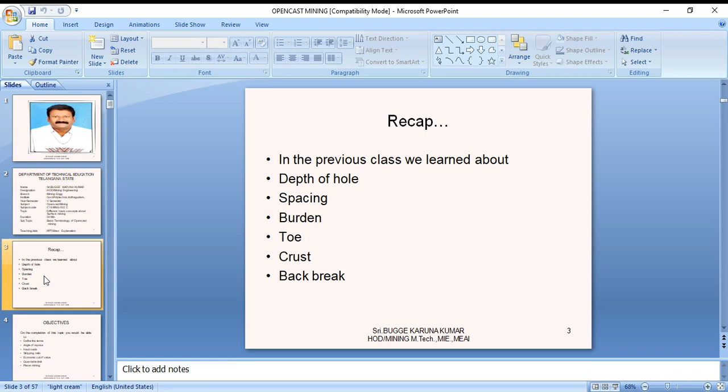Coming to the basic objective of this lecture, I am going to explain one by one: define the terms angle of repose, haul roads, stripping ratio, economic cut value, quarriable limit, and placer mining.

These are most of the terminologies encountered in the Opencast mining system. Except placer mining, which is not exactly related to this terminology but a matter already covered in earlier classes, as per syllabus I think it will be included. So let us define the terms within that terminology.

Angle of repose is one important terminology. Without understanding angle of repose, the entire system will collapse, because you study the character of the material, the boring nature of the material. Otherwise, the formation of the benches or formation of the walls becomes a big challenge if you ignore the angle of repose.

Coming to the second definition, the haul road is the key and actually the backbone of any Opencast mine, because for the depth of 100 to 500 meters in the open cast system, carrying the material is only possible by transport through haul roads.

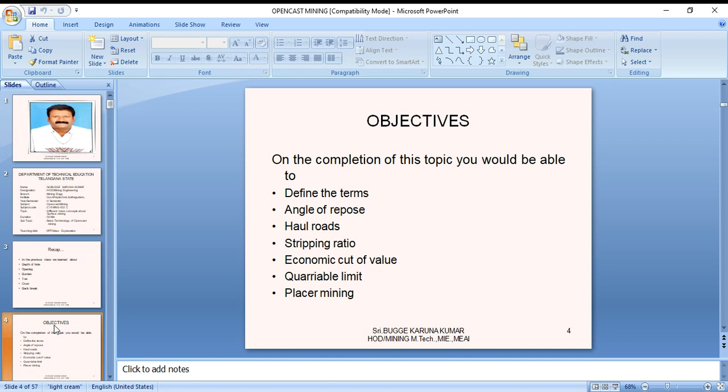I have already explained this, but it is given here again. And quarriable limit: what is the limit from which to which, and also the other methods. These are the things we are going to discuss in this slide.

Then, angle of repose. The basic definition: when a loose material is subjected to settling over the ground, the slant edge makes some angle with the horizontal, and it is known as the angle of repose. Once again reading: when the loose material is subjected to settle over the ground, the slant edge marks some angle with the horizontal. It is known as the angle of repose. This is the basic definition.

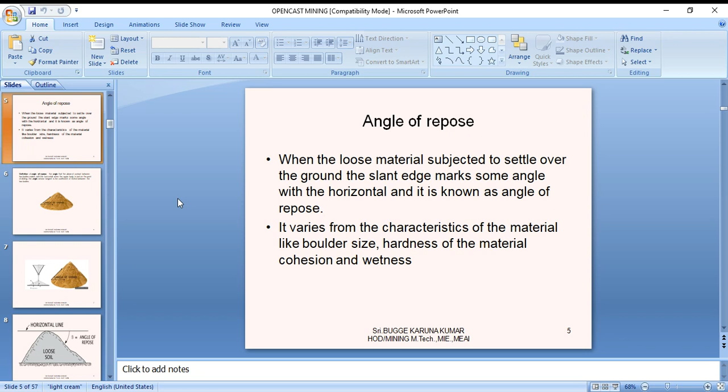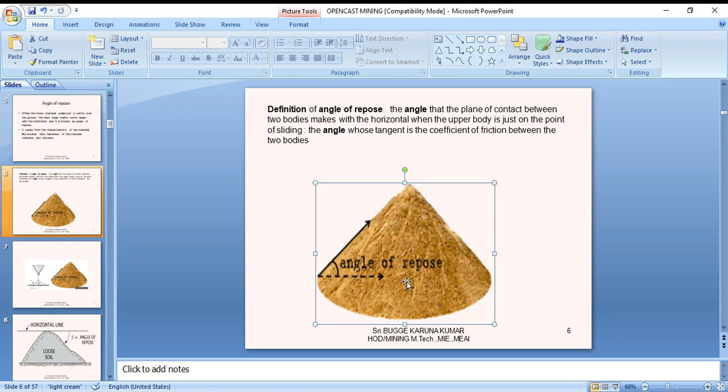Definition of angle of repose: the angle that the plane of contact between the two bodies makes with horizontal, with the upper body just on the point of slide. It is the angle whose tangent is the coefficient of friction between the two bodies. This angle, the tan theta, is the coefficient of friction between the two bodies.

This is a very important parameter in slope stability and bench angle maintenance. This is a very essential factor for bench design or slope design.

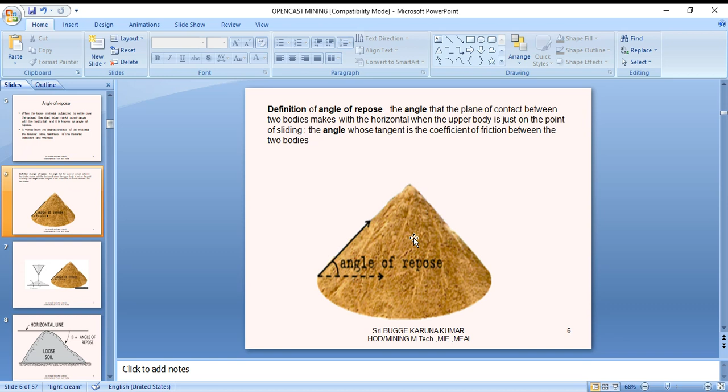So one more slide I'm showing for more explanatory purpose. Here also you can observe this is the angle, and this is the pour of the material. At some angle it will be settled, and that angle is the angle of repose.

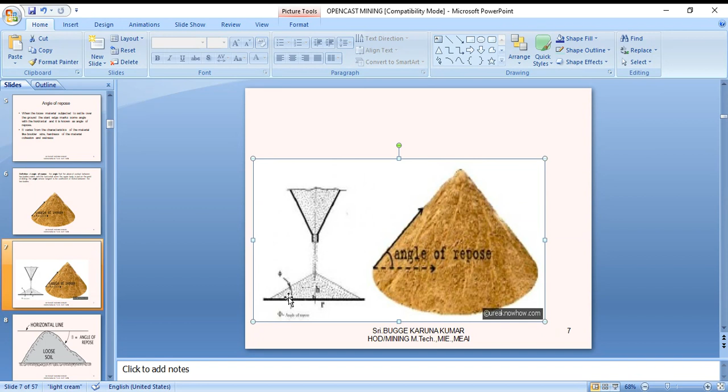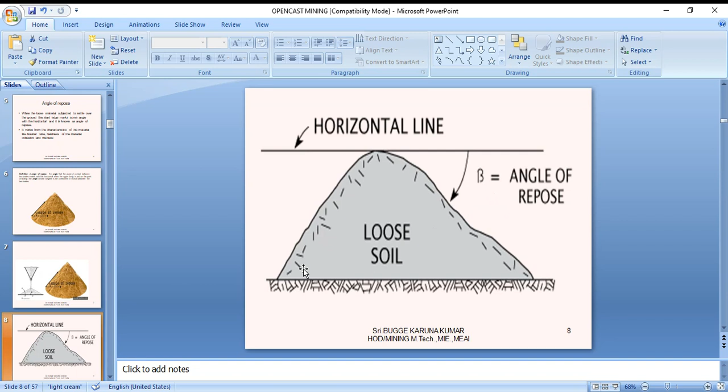For mathematical calculation purposes you can explain this, like a friction problem, it can be easily explained. Similarly, angle of repose can also be explained this way. This is defined as the angle which an inclined plane makes with the horizontal such that a body kept on it just starts to move, similar to the friction definition.

So here a block is there, just about to move downwards. That angle is called the angle of repose. Depending on friction, some load movement occurs. Whatever force is required, the force will always act against the downward force. If these two are equal, the block is not moving; if the downward force is more, it automatically slides down. So fundamentally we consider two forces acting.

One is a horizontal force and one is a vertical force, and on the opposite side the reaction is also there. So theta is the angle made here, and mg is the body weight. So mg sin theta is in the horizontal direction and mg cos theta is in the vertical direction.

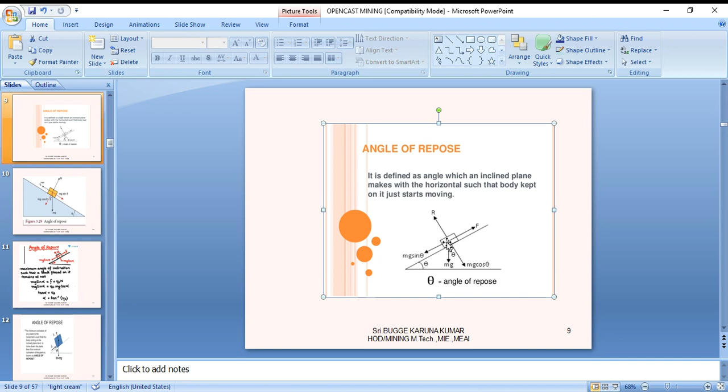The block is moving. F equals mg sin theta is the force in that direction. Similarly R equals mg cos theta. So theta is the angle of repose. This is a simple mathematical problem from friction, and we can calculate this theta, the angle of repose, and how it is maintained for a particular point.

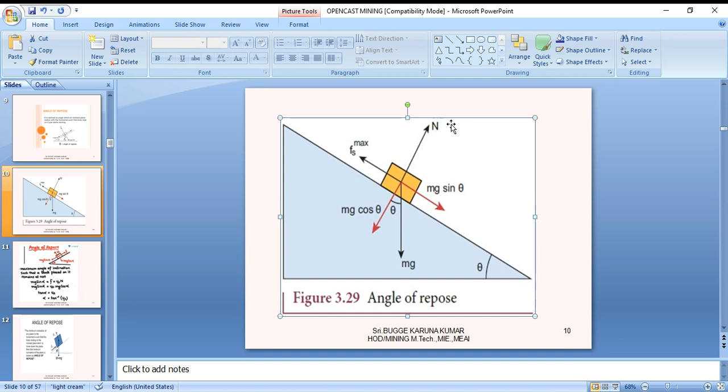Now coming to this, I can explain it again here. The angle of repose is theta. Theta relates mg sin theta, the vertical force, these are again explainable things. The normal force or reaction force is equal to mg cos theta, and mg sin theta is equal to the frictional force.

Now the complete calculation I'm showing here from the understanding level. So you can see mg cos theta is the vertical force. We are now using alpha instead of theta as in the previous slides, but there is no difference. Here I am using alpha as the angle, so don't get confused between theta and alpha, both are the same, just for calculation purposes it is made like this.

This is the maximum angle of inclination such that a block placed on it remains at rest. As seen in the earlier slide, force equals mg sin alpha, and that is equal to mu s times N, where mu s is the coefficient of friction and N is the normal force, so that is almost equal.

Similarly, mg sin alpha equals the friction force. N is the reaction, which is nothing but mg cos alpha. So f equals mu s into n. Therefore sin alpha by cos alpha equals mu s, taking cos alpha to the left side, the mg automatically cancels, since mg is nothing but the weight of the block.

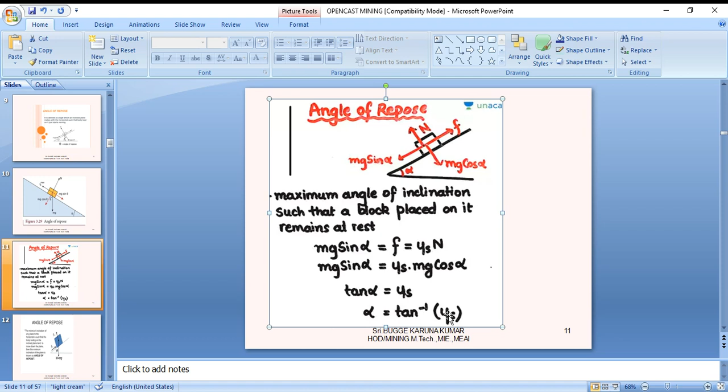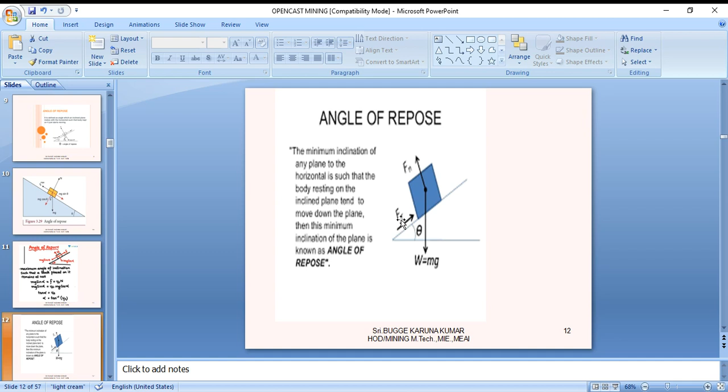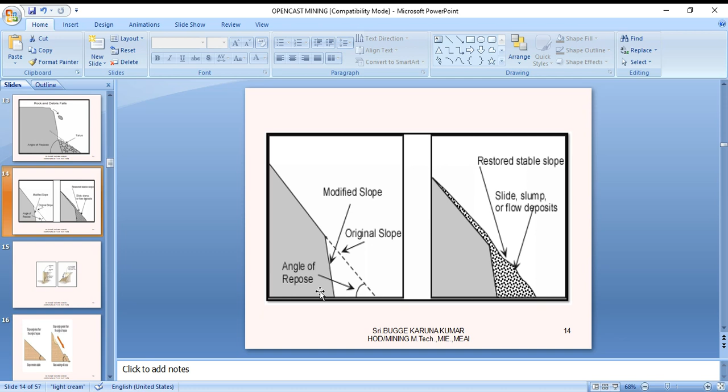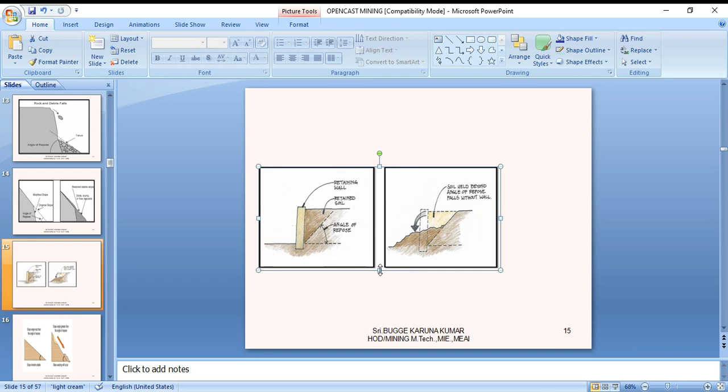I will show you one more slide on the angle of repose. This is one more example.

This is a retaining wall. Sometimes you use this, mostly coming to hilly areas, particularly in temple hilly areas, for example Vijayawada Kanakadurga temple, or if you go through the Konkan railway areas.

So maintaining a retaining wall is also very important. Otherwise, if the retaining wall is not there, I am showing how much level it will fall. Here the retaining wall holds the retained soil, which has its own angle of repose. If the retaining wall is not there, the complete soil material will fall.

So for example, if the wall is not there, this much material will be falling because the angle of repose limits retention to this much angle. Whatever is in excess of that angle will simply slide over. So how much is that angle? As already shown, alpha equals tan inverse of the coefficient of friction.

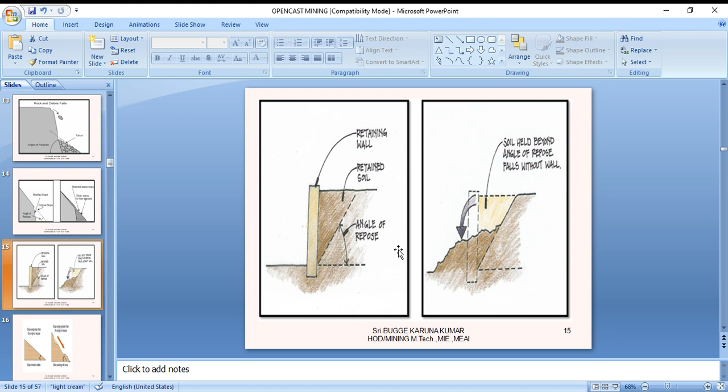The slope angle of the walls you maintain, the slope angle of the material you are powering, this should be equal to the angle of repose. If the slope angle is more and the angle of repose of the particular material is less, then automatically the difference in angle will fall. This is clearly shown here.

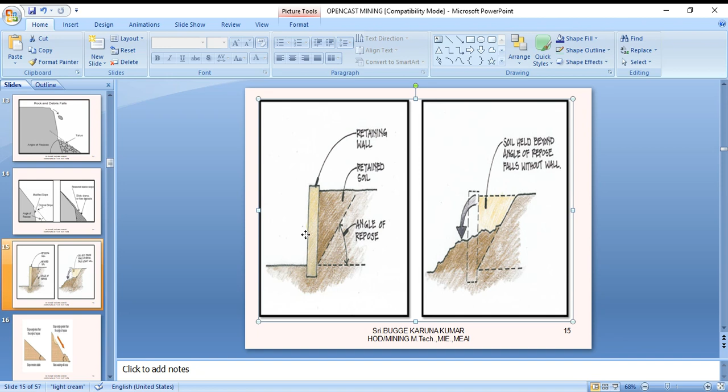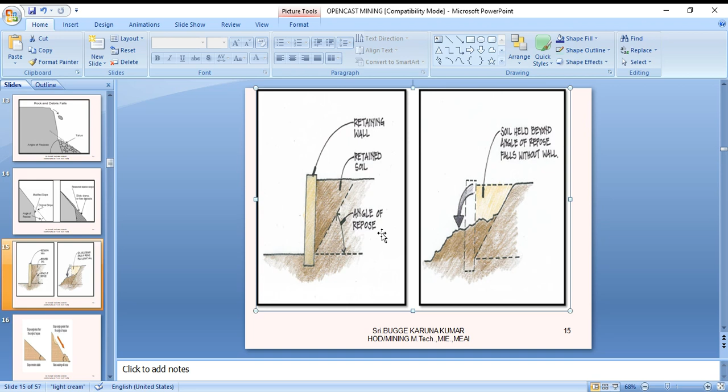This is the angle of the bench maintained, which is vertical. For example, this is the angle of the maintained slope, but actually the angle of repose is less, so this much material falls automatically. This is a complete conclusion: when the slope angle is less than the angle of repose, the slope remains stable.

When the slope angle is greater than the angle of repose, mass wasting will occur.

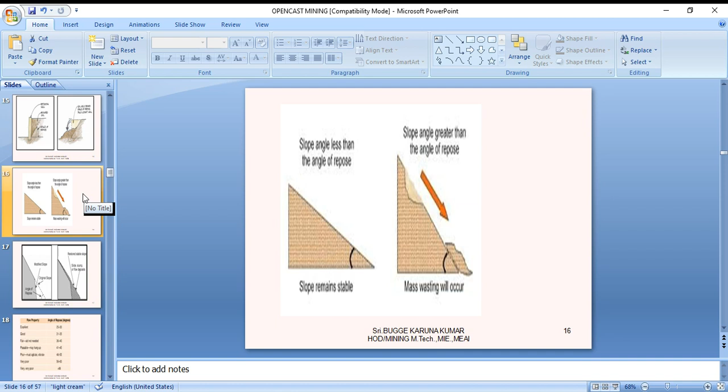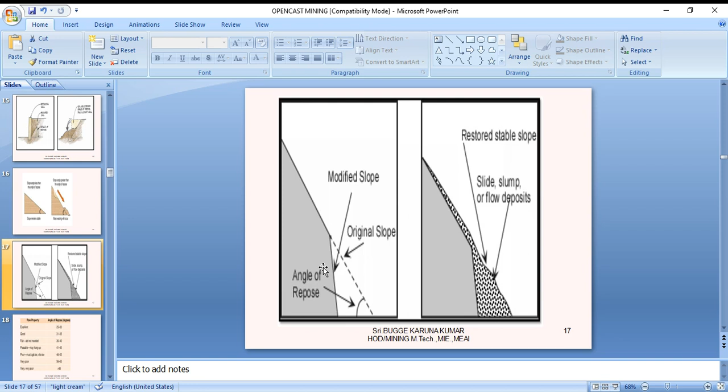Okay. Now coming to the angle of repose in degrees, which is the best one? Which angle is good, which angle is fair, which angle is passable, which angle is poor, which angle is very poor, which angle is very, very poor. So these things will be shown here. The flow property angle of repose I am showing here.

Passable, may hang up, that is 41 to 45 degrees. Poor, must be agitated and vibrated, 46 to 55. It's dangerous. Very poor, 56 to 65. Very, very poor, more than 66.

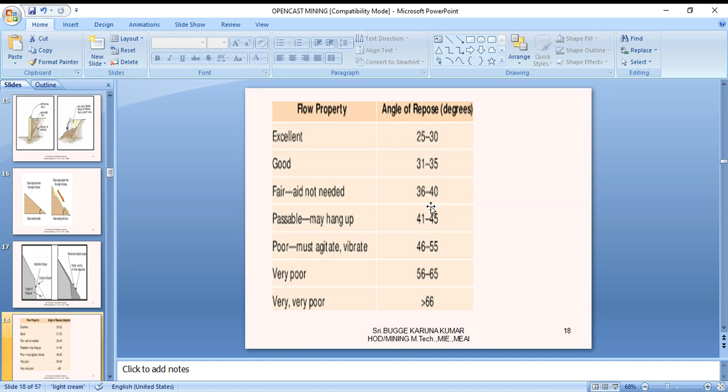So by seeing this we conclude that wherever we are checking the slope stability, if it's more than 60, the possibility of it running is more, 56 to 65. So we can conclude 45 and below is better. Below 45 is better; more than 45 has some risk.

Now, what is the rock type and the angle of repose? Loose sand, can you see? That is 32 to 34 degrees. Generally, the angle will vary. Loose sand with clay, 37 degrees. Similarly, wetland 22 degrees. Soil clay, 40 degrees to 45 degrees.

So see, loose sand, 32 to 34 degrees. Loose sand with clay, 37 degrees. Wetland, 22 degrees. Soil clay, 40 to 45 degrees. Broken rock, 34 to 40 degrees. So different types of material I am showing here. So depending upon the property of the rocks and the character of the soil, that angle will be maintained.

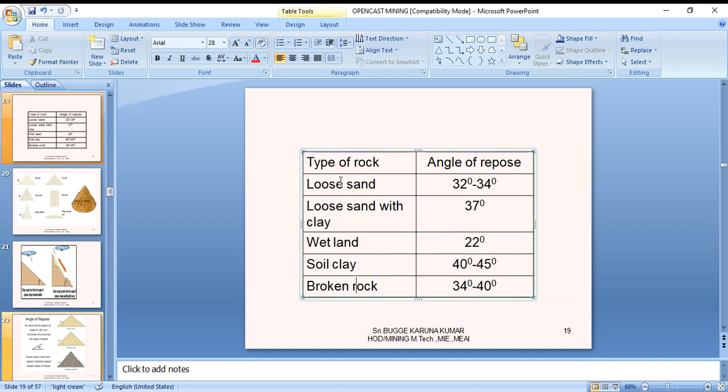Now, I repeat pictorially in one more slide shown here. So sand at 35 degrees will be stable. Dry sand also stands at 35 degrees. If it is more than that, it will fall down. Coarse sand will have more angle possible. Pebbles also, and water saturated sand will be like this. So this is the first example of the angle of repose.

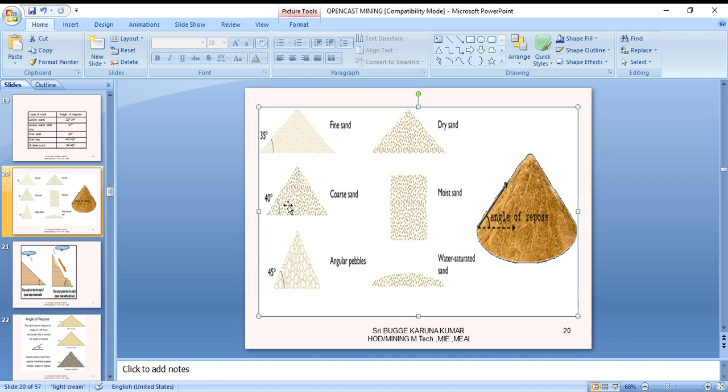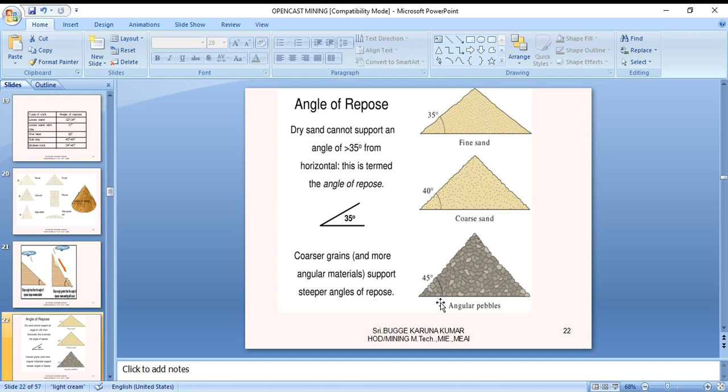Dry sand cannot support an angle more than 35 degrees from the horizontal. This is termed the angle of repose. Coarse sand, 40 degrees; coarse grained and more angular material supports a steeper angle of repose. Here, angular pebbles are shown. So fine sand, coarse sand, angular pebbles.

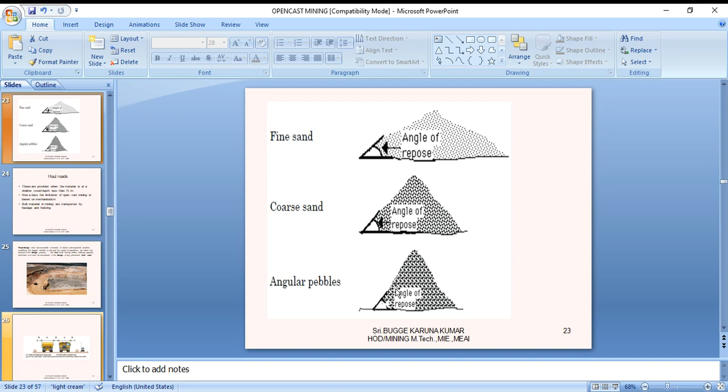Then we go to the second definition, that is the haul roads. As I already told, it is the backbone of transportation in open cast. Haul roads are meant for moving the heavy earth moving machinery in the open cast. These are not straight roads. They will be helical and spiral in nature, going up and down. And also traffic is required.

So one haul road for the one-way system and the second is a return system. So you have to maintain two vehicles moving in the path. We have to maintain the haul roads depending upon the capacity, tire management, no slippage, speed control, and also the curve system. The curves are also important, otherwise vehicles will fall down. These are to be considered in haul road design. These are provided when the material is at a shallow cover depth less than 15 meters. Nowadays, the limitation of open cast mining is based on mechanization.

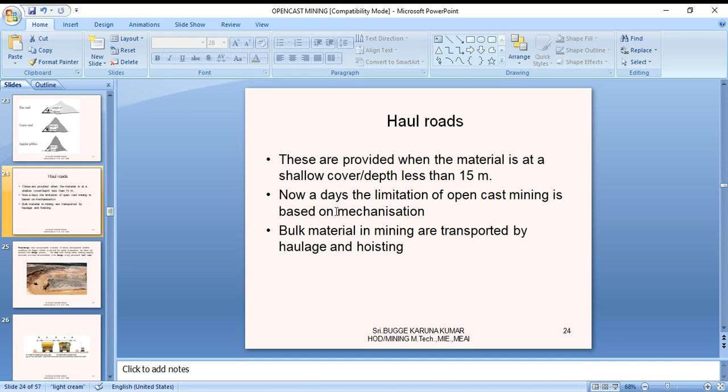Bulk material in mining is transported by haulage and hoisting. Road design is a must. The road design must accommodate a number of factors and expected weather conditions. The largest vehicle on the site and the speed of operations are taken into account in the design process. The haul truck turning radius, braking capacity, and tire size must be considered in the design of any permanent haul roads.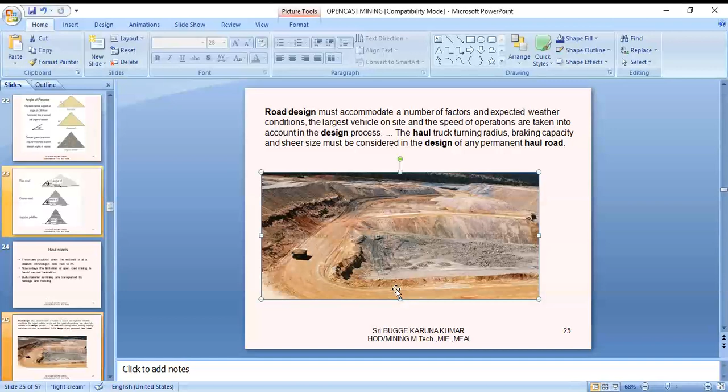So here is a simple example I am showing by using haul roads. So these are the open cast haul roads. See here, this is a simple haul road. The vehicle is moving from here to here. For dumping purposes, the material is taken upwards. So you have to maintain this. The curve also has to be maintained. If any vehicle is coming in front, they need sufficient clearance.

And also the junctions. There are some side junctions. So if the vehicle is coming this side, and this side is the junction, and some vehicles are coming this side, you have to maintain junctions as required. So haul road design is one of the key backbones of the open cast transport system. So that is very important. I'm going to the next slide.

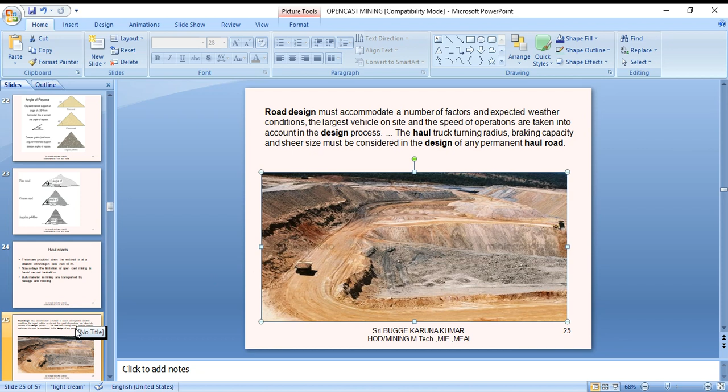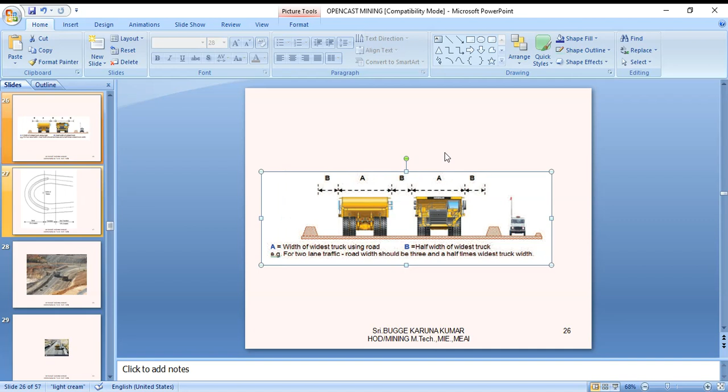Here is a typical example I'm showing for the haul road. So two dumpers are here. One is incoming and one is going outside. And also sometimes they use a pilot. The persons who are observers, that is the manager or supervisors, can travel in their own jeeps. So that is also separate. On the haul roads no vehicles are allowed except the supervisor's vehicles. The supervisor vehicle lane will also be separately maintained here.

So come here, see that A is center to center and B is the clearance from the boundary to the vehicle, and also middle to middle. So you have to maintain B in a similar way. So A is equal to the width of the widest truck using the road. So here to here is the basic width of the road. And capital B equals half the width of the widest truck. So we take A into half. This half should be on the left side. This half should be on the right side.

So for a two-lane traffic system, road width should be 3.5 times the widest truck width. So two-lane traffic road width should be how much? 3.5 times the widest truck width. So this is a thumb rule, a basic rule of any haul road design. For two-lane traffic, the road should be 3.5 times the width of the truck. For example, if it is 5 meters, then we take 15 plus 2.5, that is 17.5. That is the thumb rule of haul road design.

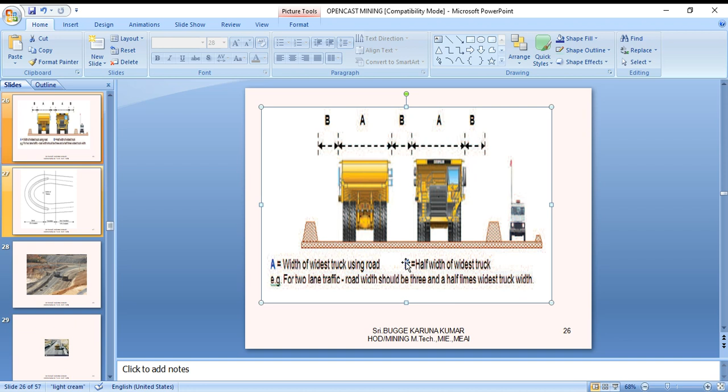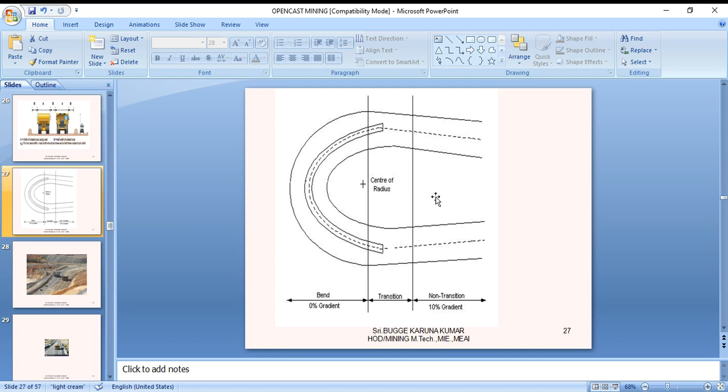This is the bend. So they have to design it in such a way that the vehicle does not fall outside due to the centrifugal force. The vehicle may come inside due to wrong design of the curves. That should be considered in an effective way when you design haul roads. I am showing one simple picture of a real open cast. These are the managers, I think.

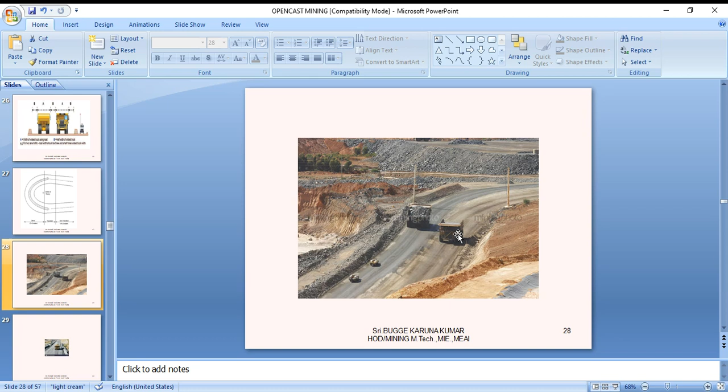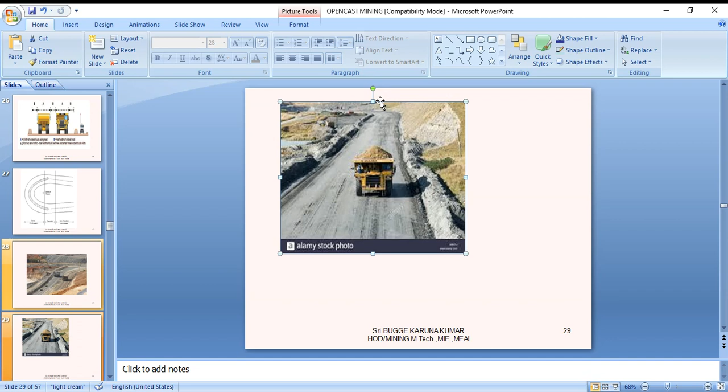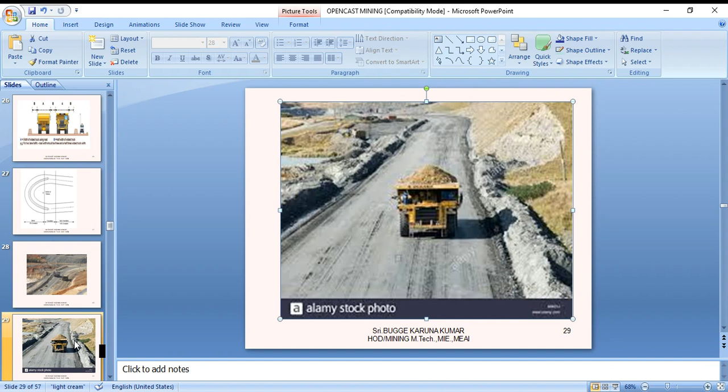So one more picture I'm showing here. This is also elaborating this. So here a single vehicle is coming. Yes, this is a single vehicle coming. So this is also showing the haul road, how the haul road will be there. And then this is a complete picture of the opencast haul roads. So it is moving like this inside the area.

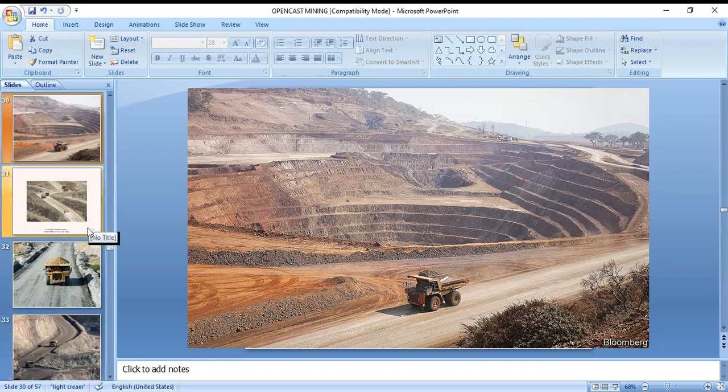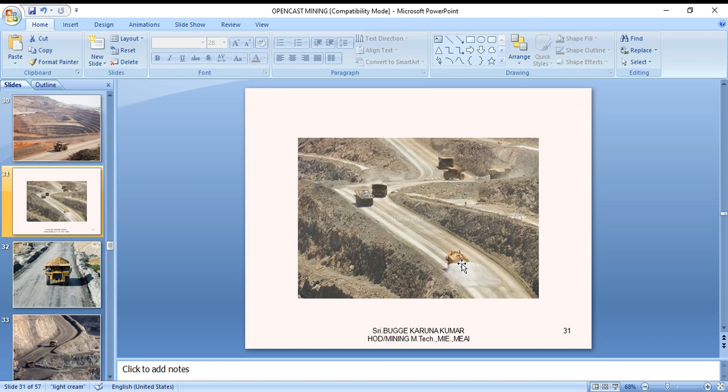So one more picture I'm showing. This is the traffic here. You see, observe. This is the traffic area. This water sprinkling is completely due to the hardening of the floor of the haul road. So one vehicle is coming inside the mine. One vehicle is going upside. Here there is a junction. Some junction is showing there, and also it is curved in nature. These are curved. So you have to design in such a way for the width and moving of the vehicles in the traffic junction also.

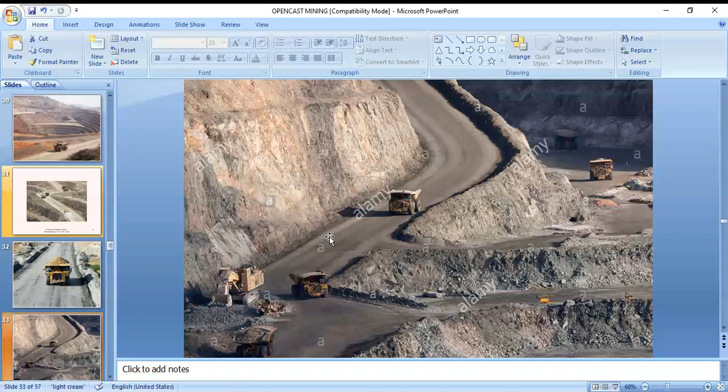So here it's very clear. It's coming down. The vehicle is ready to be loaded and ready to go in. This is the junction, and some vehicles are going from inside to outside, and also the other asset is also there. There is continued opencast working activity. So some work is going on here. The shovel. So this material can be loaded and taken out to the dump yard, the dump system provided by the managers. So this is the clearance of haul roads I'm showing here.

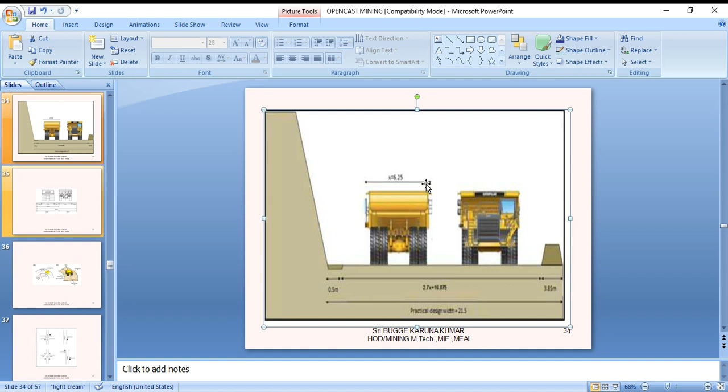Right here, showing that. So here the complete dimensions are given. So 3.85 meters, this is there. Overall, the practical design width is 21.5 meters. So this is a simple calculation. This is 0.5 meters for drainage or water pipelines or something. So the overall width is 2.7 times the width of the vehicle; this is the complete width of the haul roads.

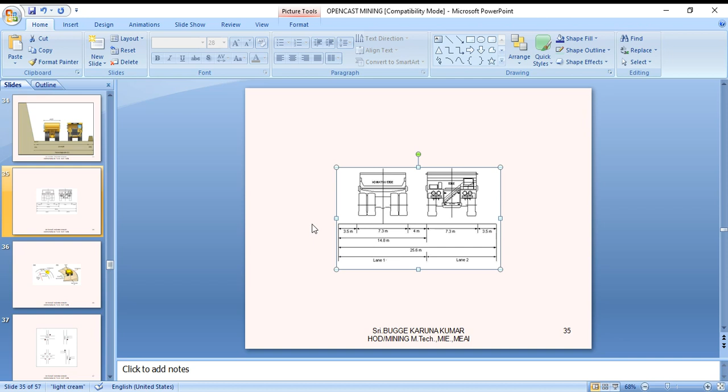Similarly, I'm showing that in a line diagram here. So here it's very clear: lane one. This is lane one. This is lane two. 25.6 meters total width. So here you can observe 3.5 on the other side, and then 7.3 is the width of that one. And 4 meters clearance is here, and 7.3 is there, and 3.5 on this side. So total from this point to this point is 14.8 meters, and from this to this point is 14.8 meters. So overall width of 25.6 meters.

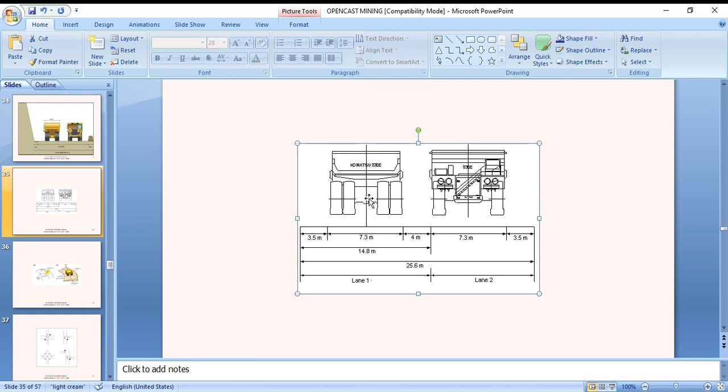Simply we can calculate it like 7.3 multiplied by 3 plus 3.5 plus 1.5, so almost 25.6. We'll get it in calculations. The point is, 7.3 multiplied by 3, and add another half, that is almost 3.5. We will get the answer. So that is the design of the haul road from lane 1 and lane 2.

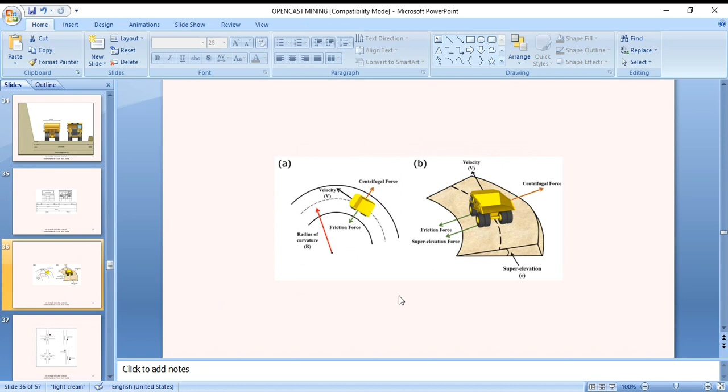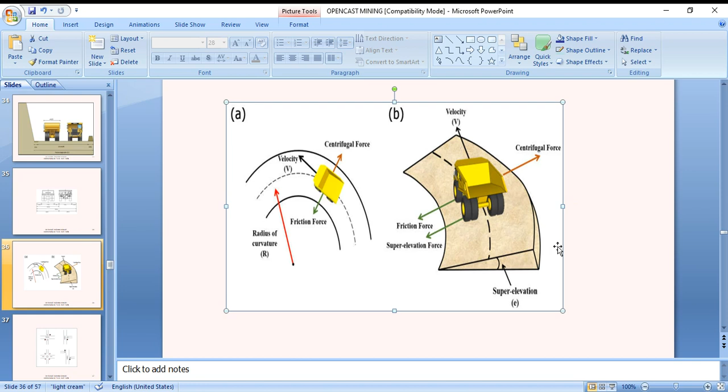Now the curved nature is also one important aspect, because most of the mine is spherical and curved in nature, because for haul roads direct distances are not available. In such conditions, centrifugal force and friction force are active. Velocity is also important. Radius of curve. So these three factors are very influencing on the vehicle. So see, the dumper is going on at a velocity, the centrifugal force is acting, the friction force is acting. In such conditions, the super elevation angle is also important. The more the angle maintained, the more the speed. If the speed is limited, you have to maintain the berm accordingly. So these are the important factors while designing the haul roads.

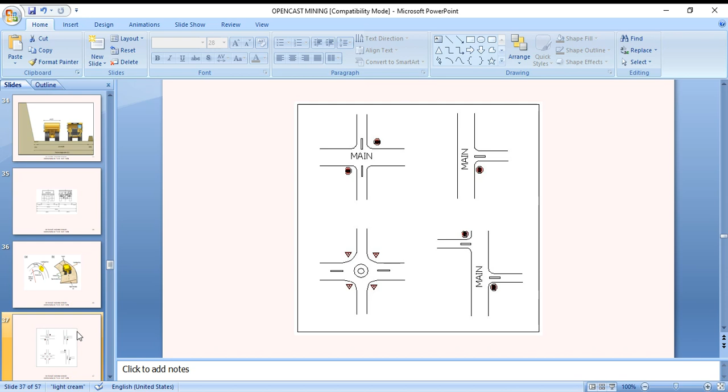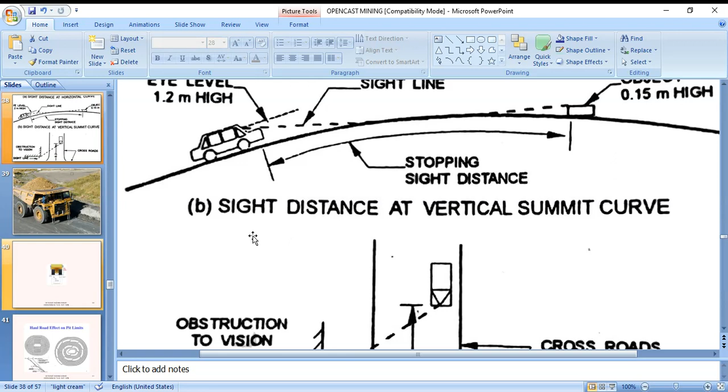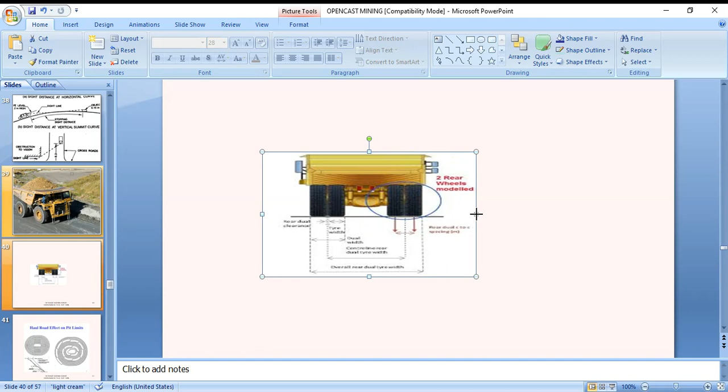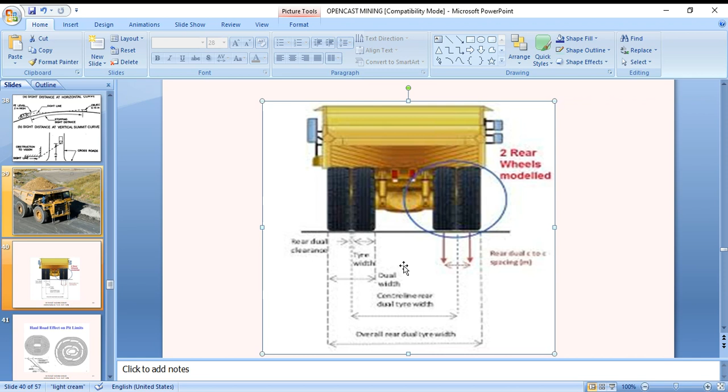Then this dumper is one of the figures. I'm showing here the dimensions of different dumpers and how they will influence the road. Here two rear wheels are modeled. These are the distance center to center, the width, and the rear tyre width. So this is also one of the influencing factors you have to consider for the design of haul roads.

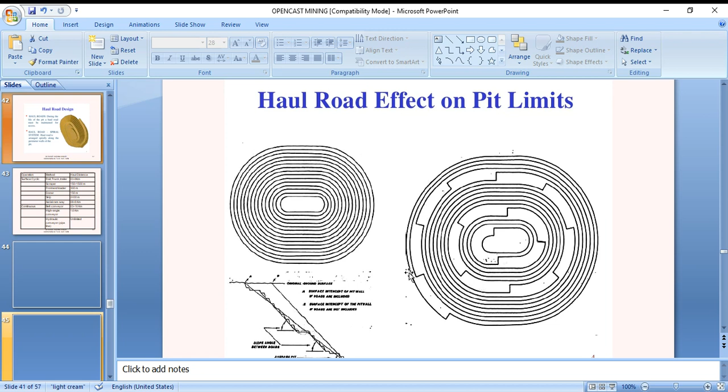So overall, on the top you can see the road is helical in nature. You have to design haul roads suitable to the vehicle as well as the vehicle suitable to the haul roads. During the life of the pit, the haul road must be maintained for access. In the spiral system, the haul road is arranged spirally along the perimeter wall of the pit.

Coming to the different types of speed, surface cyclic, continuous. These are the other vehicles. So now I conclude haul roads and go to the next topic.

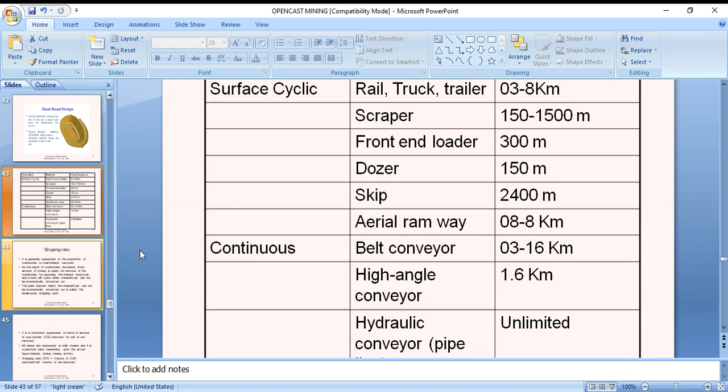So these are two important definitions of the stripping ratio. This is the ratio between overburden and mineral. If the depth is more, automatically the waste removal is more. So the coal versus the stripping ratio should be economical. Beyond the break-even, the waste is more and the coal obtained is less. So the economic stripping ratio is very important while designing the angle of the slope of the benches or

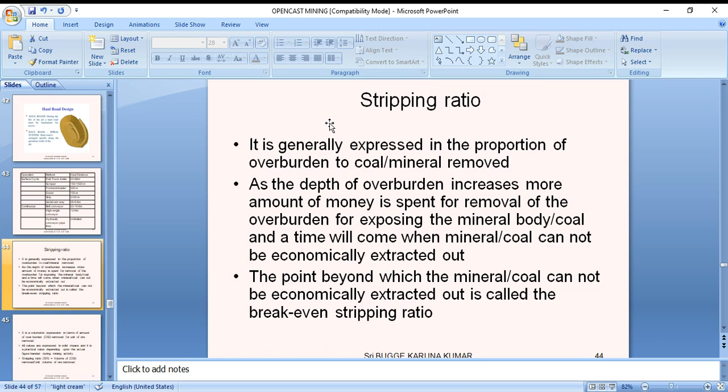overall bench. It is a volumetric expression of the amount of overburden removed per unit of ore removed. All values are expressed in solid measure, and it is a practical value depending upon the actual figures during mining activity. Stripping ratio equals volume of OB removed per unit volume of ore recovered.

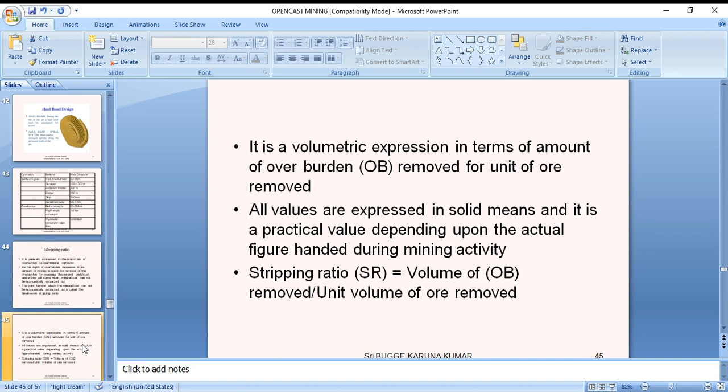Now the standardized ratios. In manual mining, it is 1 is to 1. In semi-mechanized, it is 1 is to 1.2. In mechanized, 1 is to 3 to 1 is to 10. Highly mechanized, it may be 1 is to 10 to 1 is to 20. So depending upon the

mechanization: manual means they're not using drilling and blasting, loading manually. These are the influencing factors. Semi-mechanized means the transportation has some mechanization, so the cutting speed will increase. Mechanized is completely mechanized, with drilling and blasting going on fast, so dumper size and loader size increase, and road widening is required for the movement of vehicles. So depending upon the scale of mechanization, the stripping ratio will vary from area to area.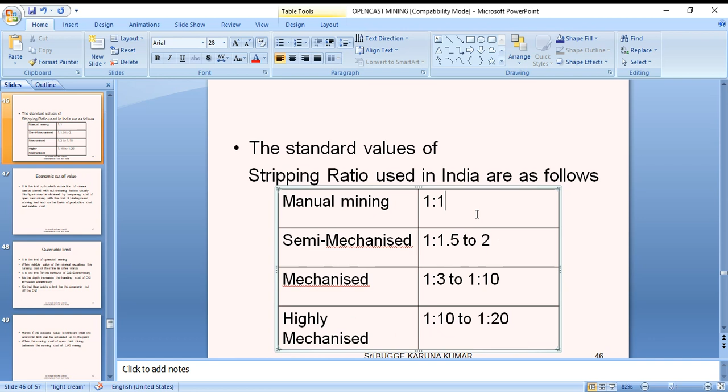So what is meant by cut-off value? It is the limit to which extraction of the mineral can be carried out without incurring losses. Usually the figure is obtained by comparing the cost of the opencast mine with the cost of underground working, also on the basis of production cost and saleable cost. So the economic cut-off value is from that point of view, the selling value, the marketable value. Say 2,000 per ton in the market.

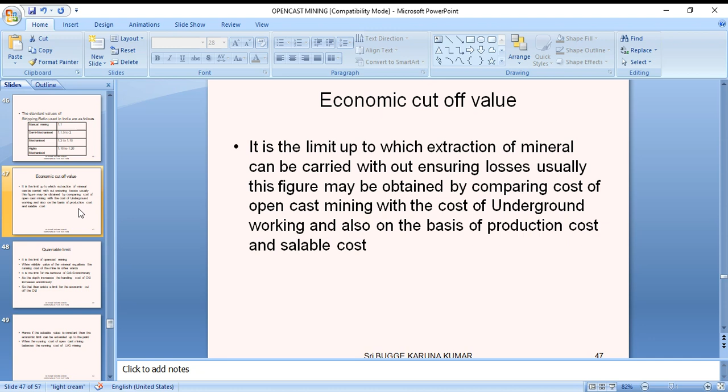So, 2,000 rupees of value you have to distribute. That is economical or uneconomic. So that is one important economic factor of computation.

Quarry limit is very important. It is the limit of an open cast mine, when the realizable value of mineral equals the running cost of the mine. In other words, it is the limit for the economical removal of OB. As the depth increases, the handling cost of the OB increases enormously, so there exists a limit for the economic cut of the OB.

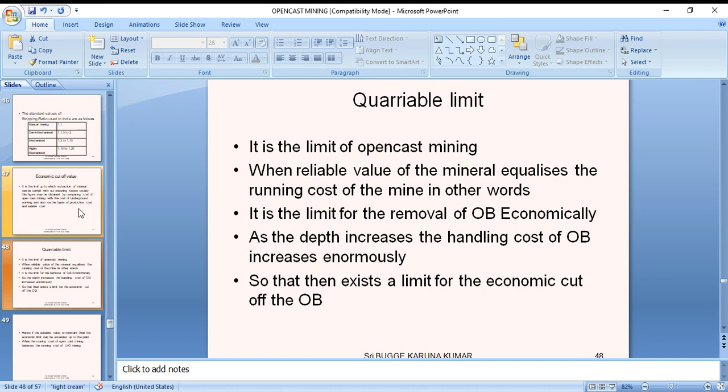So angle is very important, otherwise the quarryable limit is increased. In later classes also we learned that if the angle is more, the quarryable limit is more. The optimum quarryable limit is essential. Hence, if the saleable value is constant, the economic limit can be extended up to the point where the running cost of open cast mining balances the running cost of underground. You should be comparing that.

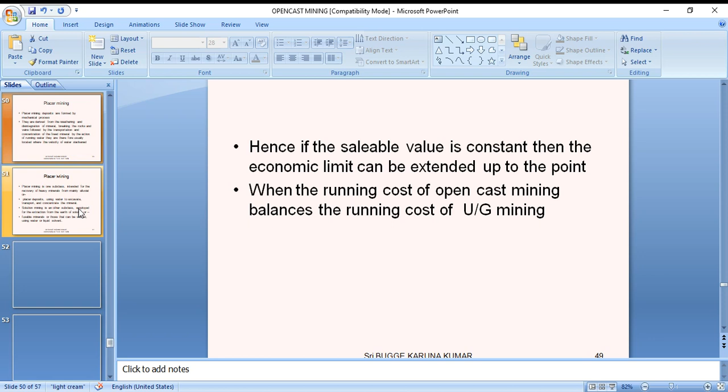Another important topic in this terminology is placer mining. Placer mining is related to placer deposits, particularly in seashore areas. Indian Rare Earths Limited extracts these, and some dredging corporations. In most coastal areas there are these types of placer deposits, and mining them is called placer mining.

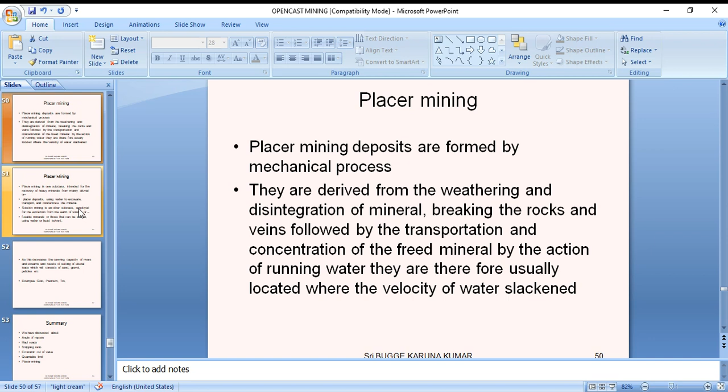Placer deposits are formed by mechanical processes. They are derived from the weathering and disintegration of the minerals, breaking the rocks and veins, followed by the transportation and concentration of the freed mineral by the action of running water. They are usually located where the velocity of the water is slack. So placer mining is one of the subclasses.

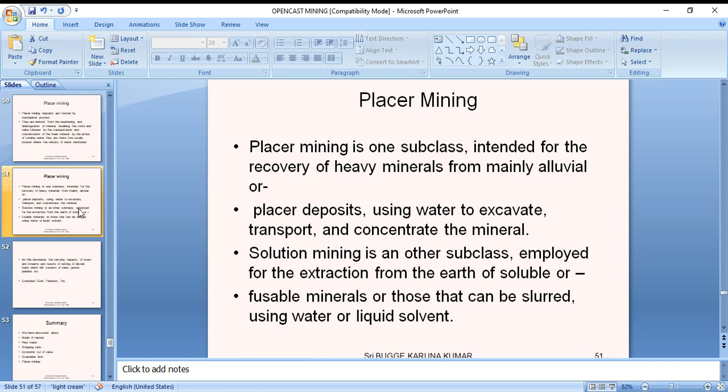It is a form of surface mining intended for the recovery of heavy minerals from alluvium or placer deposits, using water for excavation, transport, and concentration. Sometimes they use air jets, water jets, and also solution mining, the leaching process. You can extract this type of mineral as a slurry using water.

This is due to decreasing the carrying capacity of rivers and streams, resulting in settling of loads which consist of sand, gravel, pebbles, etc. For example, gold, platinum and tin deposits can be extracted through the placer mining process.

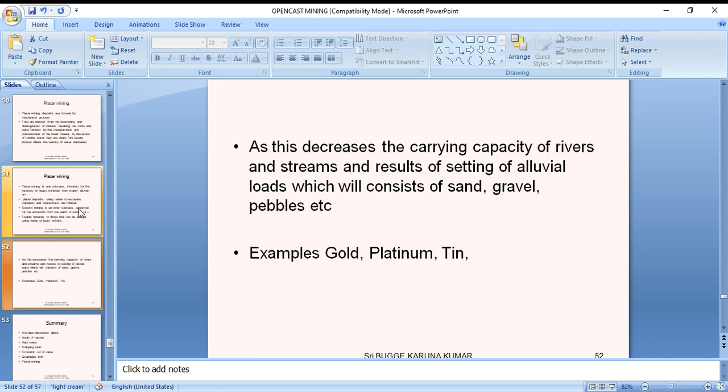So now I am concluding the slide show. We have discussed angle of repose, haul roads, stripping ratio, economic cut value, quarry limit, and placer mining. So I hope that you are all understanding the basic concepts of angle of repose, haul roads and stripping ratio.

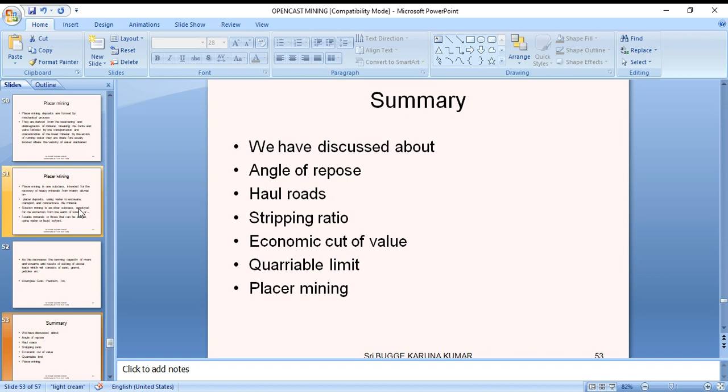Now I am going to some quiz. This is related to your competitive examinations. When you pass out, some of the questions may arise in quiz format, that means objective type, in ECET examination or JMT, Junior Mining Engineering examination. You can encounter this type of question. So as a model I will give one question.

The standard value of the stripping ratio used for manual mining in India: is it 1:1, 1:2, 1:3, or 1:4? Generally, we already discussed stripping ratio in previous slides. 1:1 is meant for manual, right? 1:2 for semi-mechanized, and 1:4 for mechanized.

Mostly these others are not suitable. So 1:1 is simply for manual mining. Depending upon the nature, for highly mechanized we go to 1:10 to 1:20. So that concept you should bear in mind, and accordingly you can answer, right?

Now, you have an assignment on placer mining, right? Collect from the net what a placer deposit is and what their extraction techniques are. You should take this assignment and submit it in the next class.

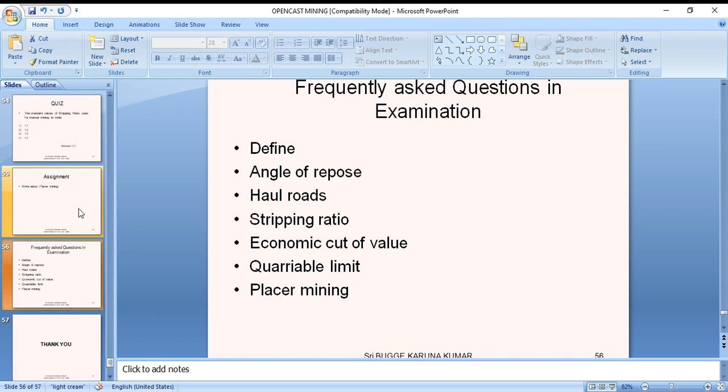So frequently asked questions in the examinations are the definitions of angle of repose, haul roads, stripping ratio, economic cut value, and quarriable limit. These are generally frequently asked questions in your board examinations. Right? Now I am going to conclude.